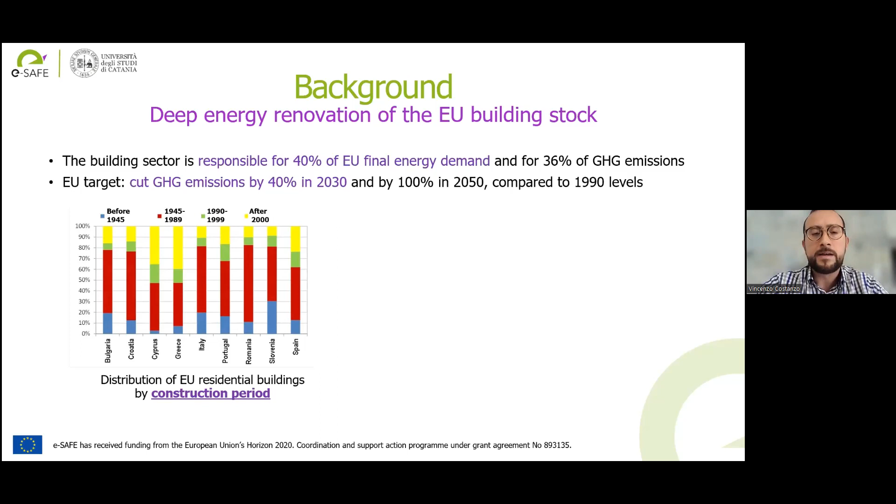If we see the histogram on the left, I have reported the construction period for the building stock in Europe for most European countries. If we look at the graph, the blue and red bars represent buildings built before 1990, and this represents the vast majority of the buildings in the stock. So we have a building stock which is really old and energy inefficient.

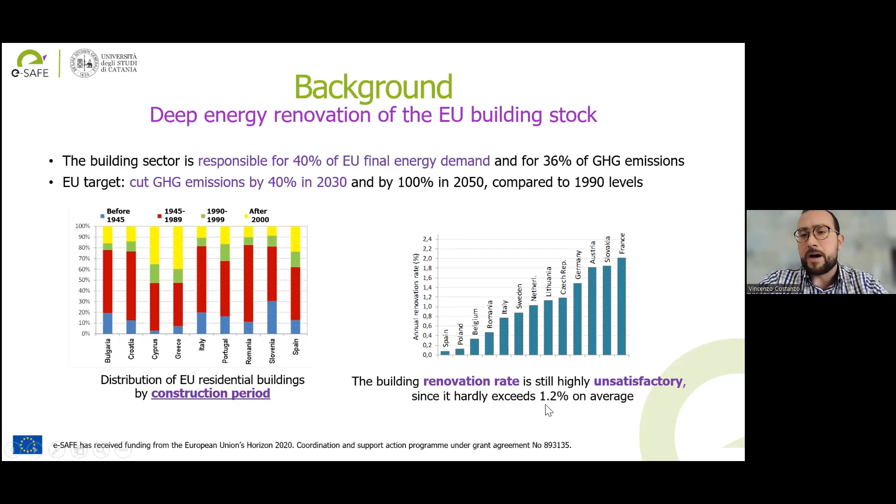Some current studies, also developed by the European Union, say that in order to meet these very ambitious targets, we should renovate the existing building stock at a rate of at least 3% per year. But actually, the renovation rate in every country is much less than that, about 1.2% on average. So we have a lot to do on the renovation side.

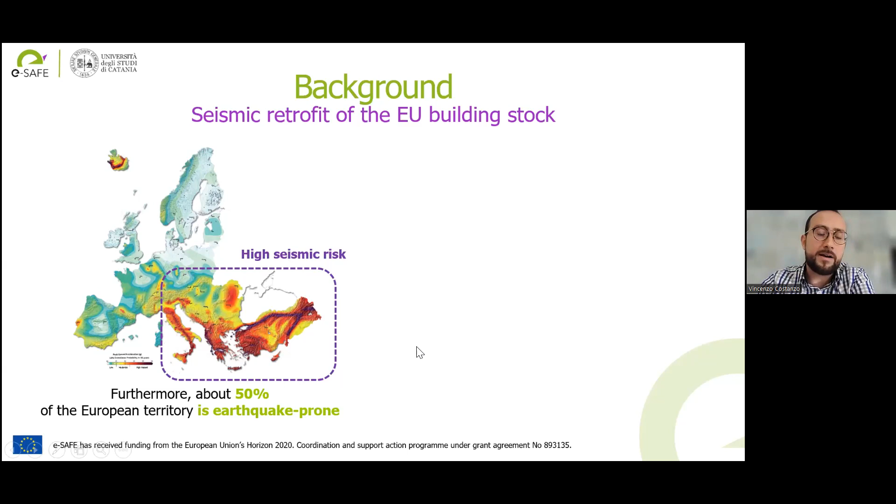Besides the energy figures and the importance of decarbonizing our environment, we also suffer from seismic risk in Europe. About 50% of the territory is earthquake prone, and in particular the zones highlighted here—some Eastern Mediterranean countries, let's say Italy, Greece, but also Turkey—suffer from very high seismic risk.

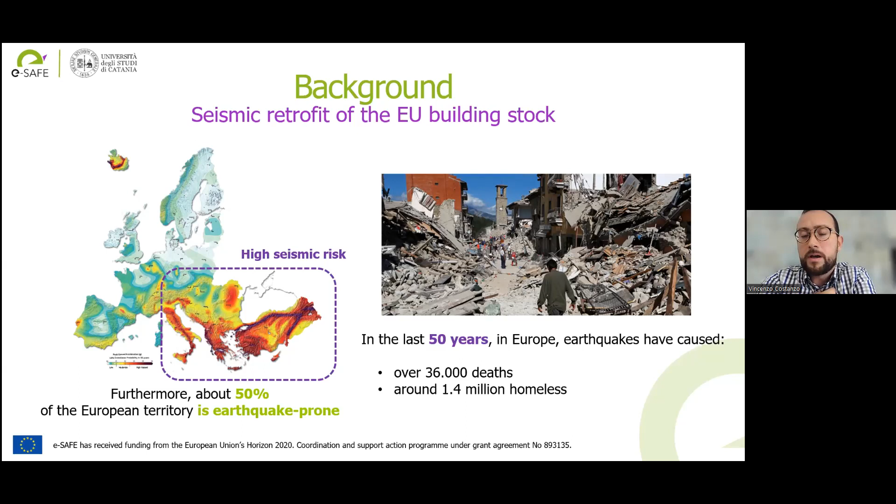Just to give some figures: in the last 50 years in Europe, earthquakes have caused more than 36,000 deaths, and also the need to relocate more than 1.4 million people.

It's an immediate consequence that it doesn't make too much sense to renovate buildings only from the energy side if we also suffer from a very high seismic risk. So this is exactly what e-SAFE wants to tackle: combining energy and seismic renovation.

The e-SAFE project targets specific building constructions. We are not targeting all possible existing buildings to renovate, but focus on non-historical buildings made of reinforced concrete—the typical buildings found after the Second World War for reconstruction. Something between 80 and 90% of these buildings are made up of reinforced concrete frames, so for these buildings we propose a combined energy and seismic renovation.

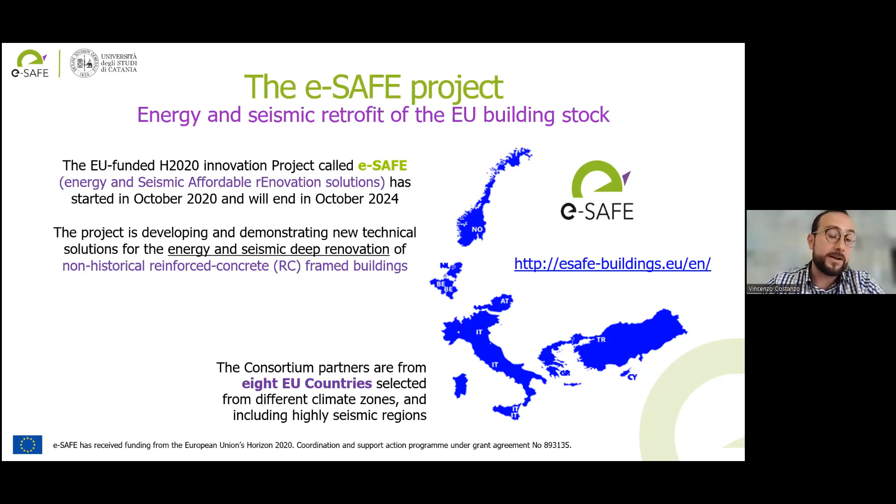The project started in October 2020 and is expected to be finished by October 2024. We have 8 different consortium partners from 8 different European countries, some of them also with high seismic risk. The e-SAFE renovation scheme concept is highly holistic.

We want to combine not only technical solutions which are very efficient, but also make these solutions affordable for as many people as possible. So in the frame of the project we also care about cost—we want to minimize cost, we want to minimize disruption. During the renovation works, people can stay inside the building and don't need to relocate elsewhere. We also propose some financial tools to make upfront costs more affordable.

A key point is also the social issue. We need to make people aware of the need for this major renovation. But about this specific topic, my colleague Venera Pavone will talk more in detail later on.

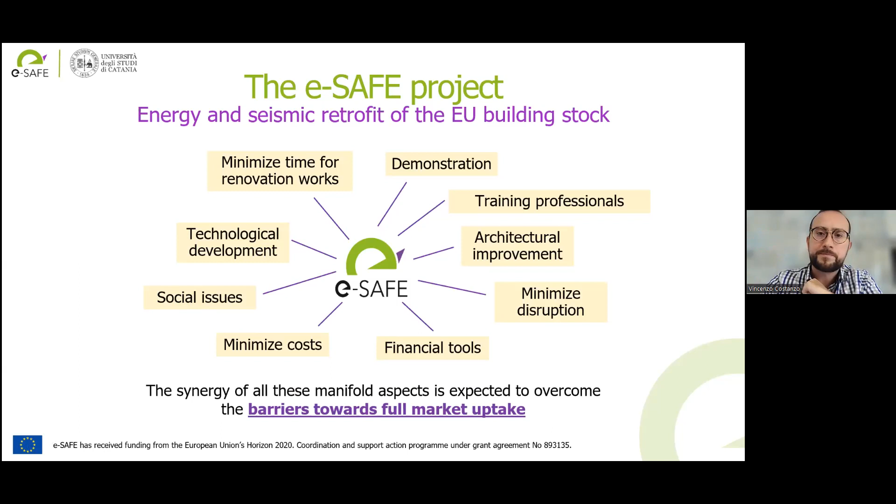From a technological point of view, we want this renovation work to be done completely from the outside. The idea is to create a new building shell through the use mainly of prefabricated wooden panels. These wooden panels come in two different forms. The e-CLT panel, made of cross-laminated timber, has a structural function. The combination of these panels, attached to the existing frame through innovative friction dampers, makes the building seismic resistant.

The other prefabricated panels, called e-PANEL, are more for the energy efficiency side. These panels are covered with a suitable layer of thermal insulating material. The combination of e-PANELs and e-CLT also creates a new architectural image for the building.

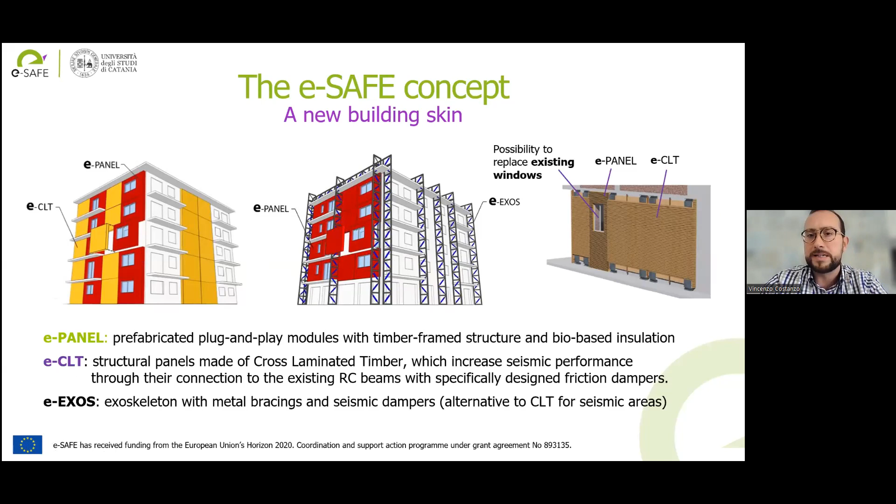In some cases, where for example the application of e-CLT is not convenient, we envisaged the use of some metallic exoskeleton for improving the seismic resistance. This solution is called e-EXOS.

From the energy side, besides the improvements due to better insulation, we have also developed an innovative mechanical system configuration called eTherm. eTherm is basically a new centralized technical system for the building that provides altogether the thermal energy needed for space heating, space cooling, and domestic hot water production.

The eTherm concept makes use of electric heat pumps. These heat pumps are air-to-water heat pumps, so they take heat from the outdoor air and then convert this heat into heating or cooling according to the season, through the production of hot or chilled water.

This water, called the technical water, is stored within suitable storage tanks. From the storage tanks it is driven through every apartment into smaller tanks. These tanks combine domestic hot water for residential uses and have embedded plug-and-play hydraulic connections to connect to the existing system for heating and cooling.

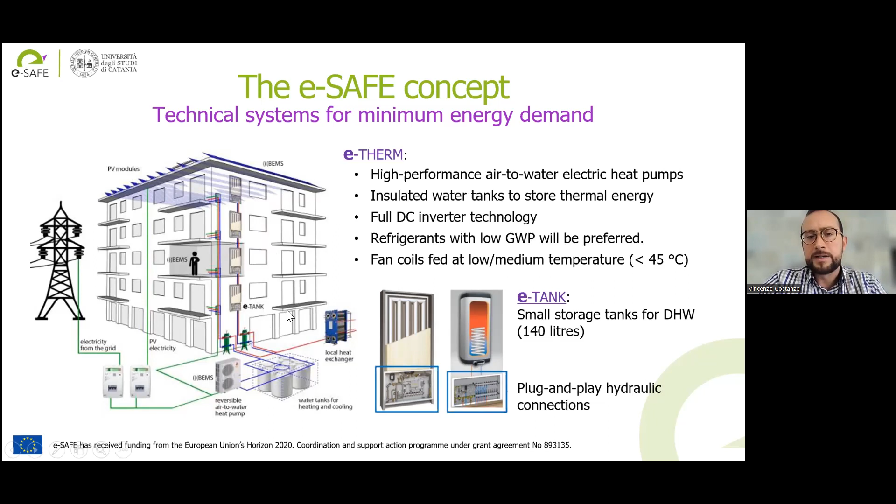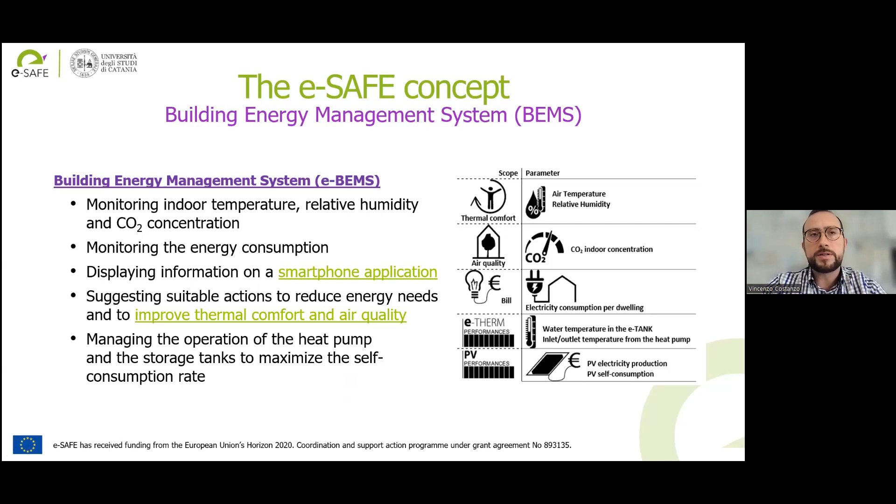Finally, we have a building energy management system called eBEMS, which manages all the technical systems and also performs monitoring of indoor conditions in terms of thermal comfort and indoor air quality. The aim is to provide residents and building users with meaningful information about current indoor conditions, while also suggesting actions—for example, opening windows if the air is too stale—to improve not only thermal conditions but also the energy consumption of the building itself.

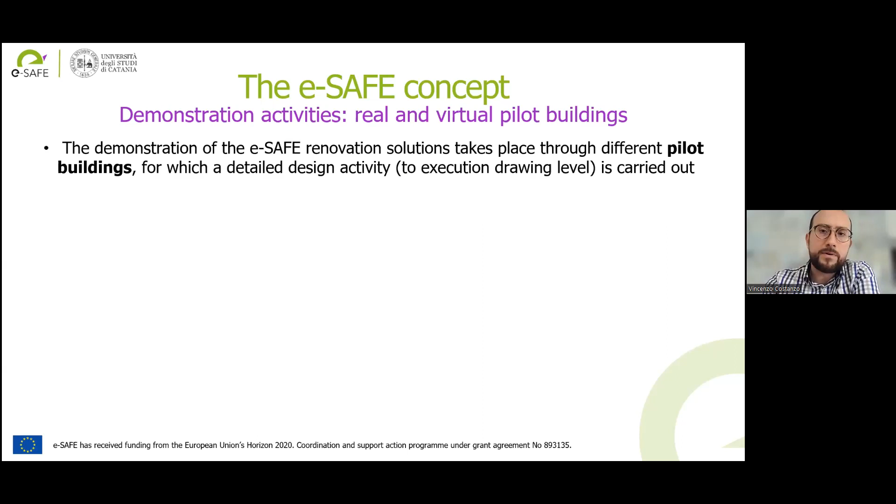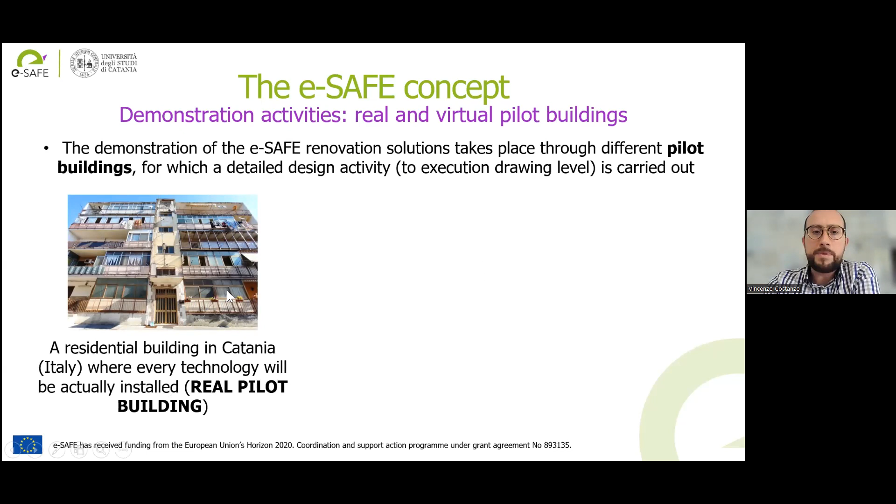The demonstration of our concept takes place through pilot buildings. These pilot buildings are three. One of them is located in Catania, southern Italy, and this is called the real pilot building because actually every technology I have already presented will be really installed on this building.

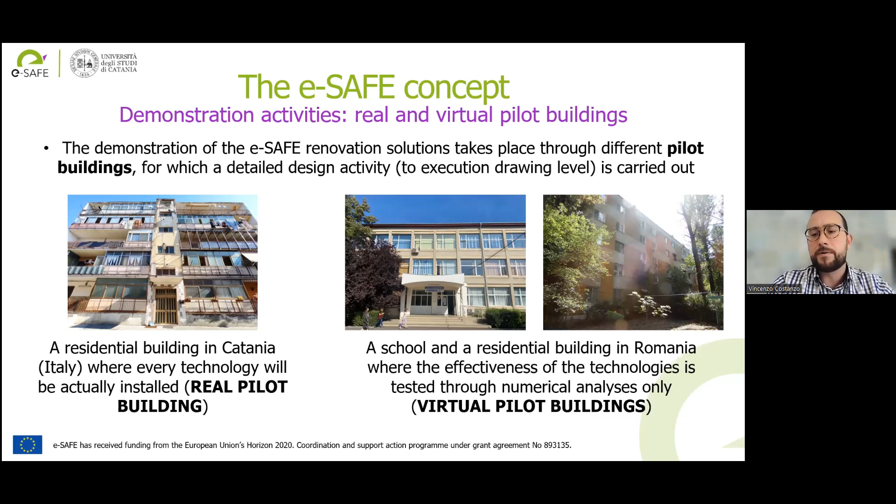We are also working on the renovation of two other buildings located in Romania, in particular a school building in Timisoara and a residential building in Bucharest, where the effectiveness of the technology is assessed through numerical analysis. In these two pilot buildings, we will not really install the technologies, but we are providing a very detailed design for the local stakeholders that can use this design for getting fundings and so realize the renovation.

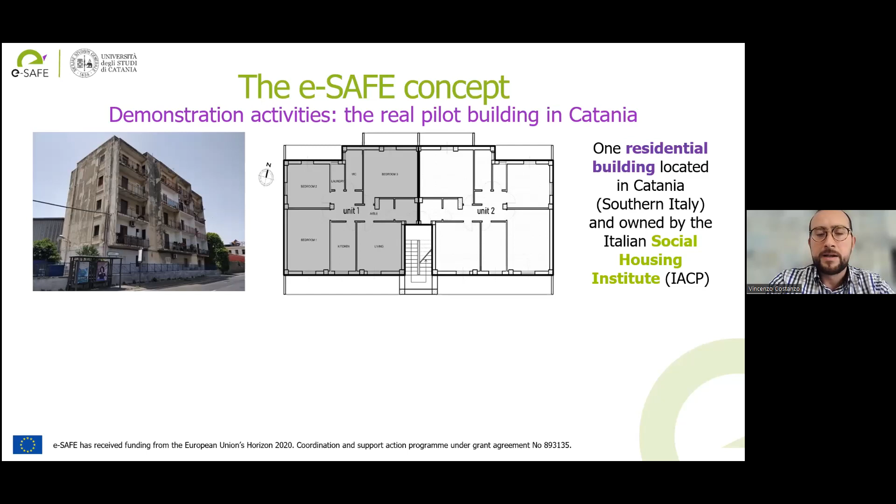Now I will present some of the expected energy savings and improvements in the energy efficiency of the buildings, starting from the pilot building in Catania.

This pilot building is a residential building that was built around 1960 and was never renovated since then. It is a 5 floor building with 2 apartments per floor, and we do not have any centralized system for heating, cooling, or domestic hot water. So every flat is totally independent from each other.

Within this flat, we have some basic boilers and electric heaters that provide domestic hot water production and heating of the environment. Just in some flats we have split units that provide also space cooling. The envelope is quite poor in terms of thermal performance, as we can see from the quite high U values for the walls, the roof, and the windows.

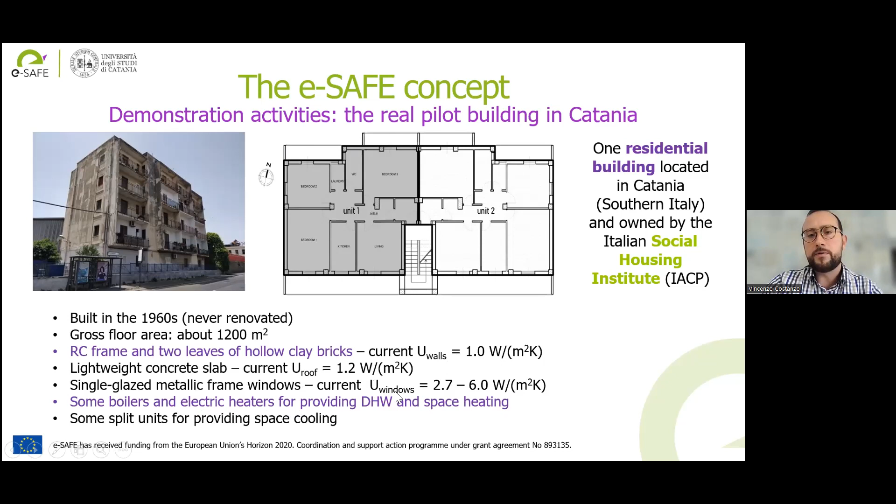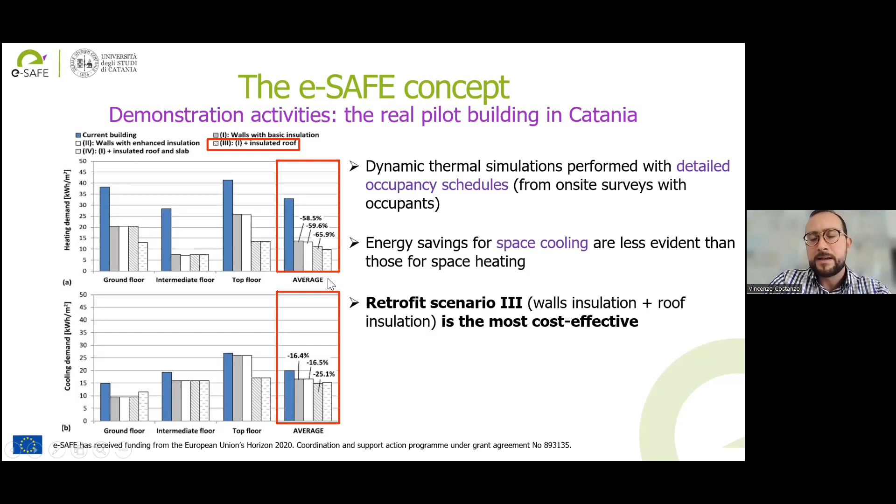We ran also a cost effectiveness analysis, and we found that the best cost effective retrofit solution is that of insulating the outer walls, the roof, and of course using the e-therm concept. In this case, we can expect energy savings for heating of about 66%, and of about 25% for space cooling. This turns out that the amount of energy which comes from fossil fuels is saved in a range between 85 to 95%.

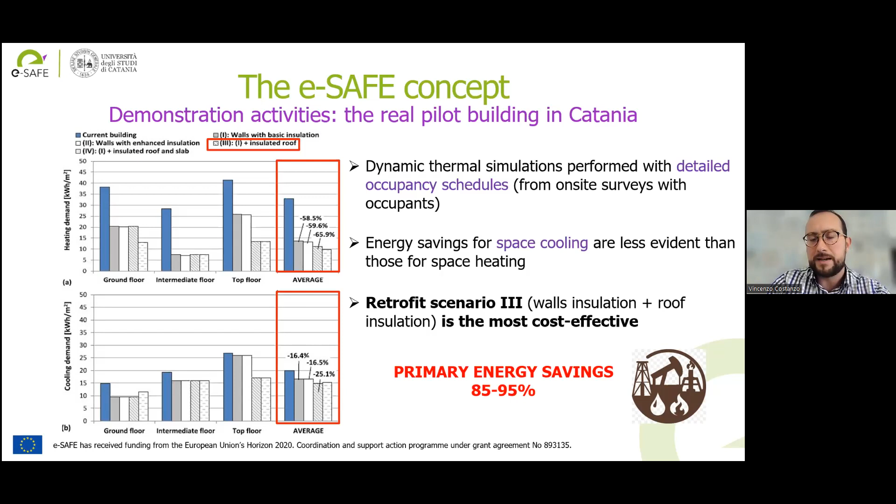In the case of the school building in Romania, which is located in Timisoara, the building once again was built around the 1950s, but it went through a renovation around 2006. In particular, it was the windows that were replaced during this renovation.

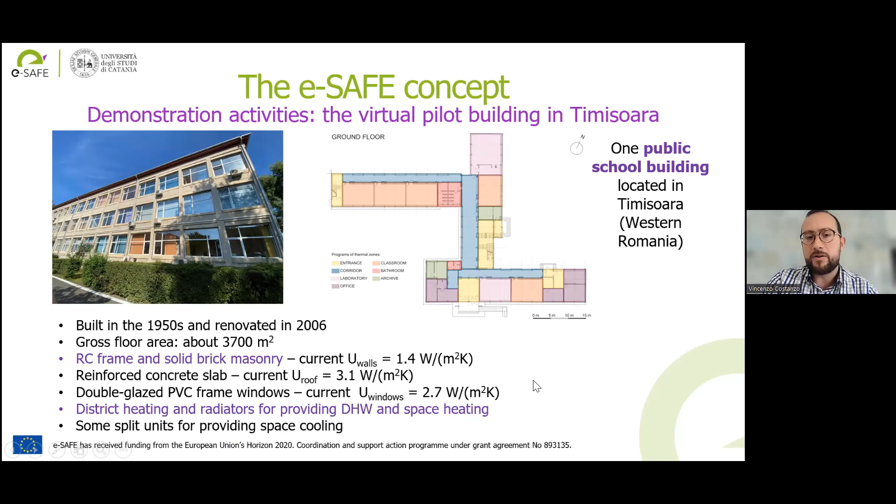Also in this case, the envelope, the walls, the roof, and in minor part also the windows were not that high performing. But in this case, the building was provided with a district heating system for providing heating and domestic hot water production. Once again, we ran other simulation analysis, and we focused only on the heating energy demand because it was the highest energy driver. So we almost have no need for cooling in this part of Romania.

A particular aspect of this renovation is that we also considered a mechanical ventilation system with heat recovery, because one of the issues reported by the students and teachers from the school was that during the winter the heating system was on, but it was not very well controlled, so there was overheating within the rooms. But because of this problem, people were used to open the window, so we had a very highly energy inefficient behavior from the people there.

I'm sure this is something Venera will talk about a bit later.

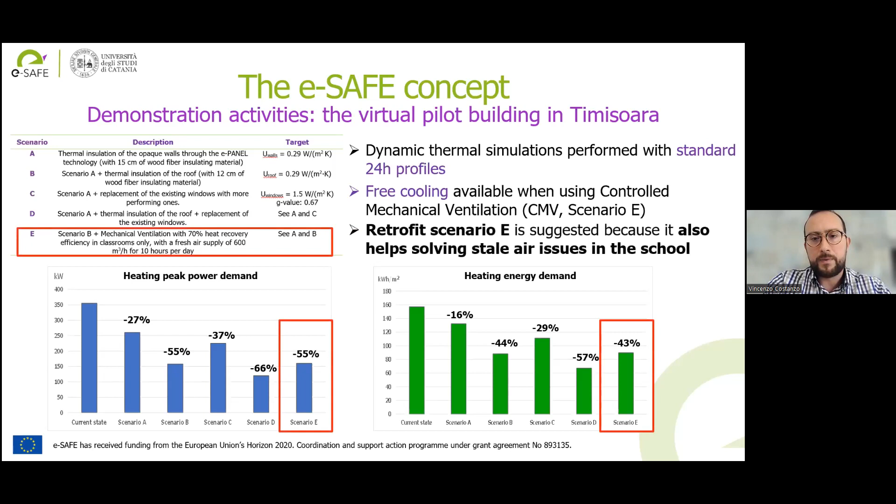So once again, with the help of these advanced simulations, we developed this retrofit scenario for which savings of about 43% in the heating energy demand and of about 55% in the peak heating power should be achieved. This turns out to be within a primary energy savings range of 75 to 85%.

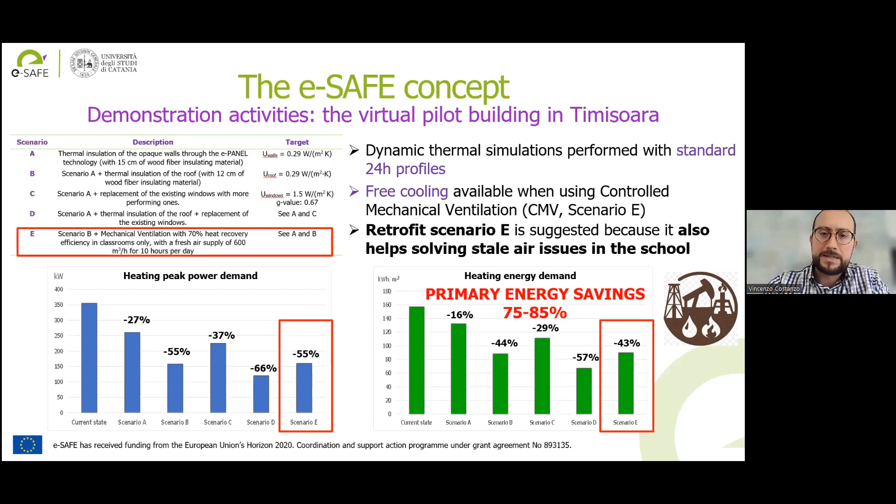Finally, for the building in Bucharest, which shares something with the building in Catania, again it was built around the 1950s.

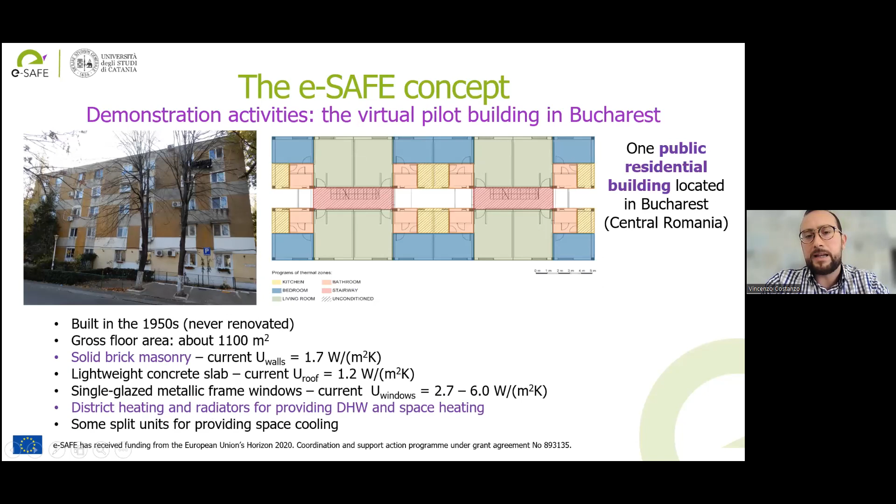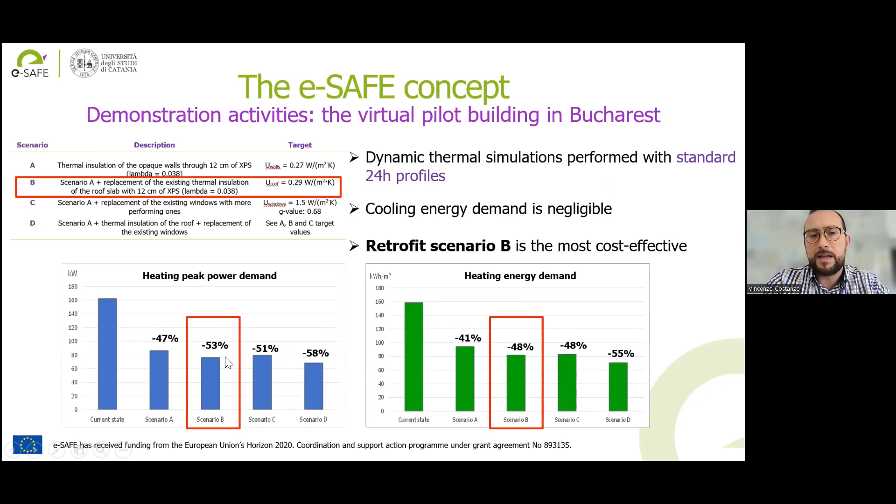It has 5 stories, still with an underperforming building envelope, but with a district heating system combined with radiators in each flat for providing heating and domestic hot water production. Savings are expected in the range of 50% for the heating energy demand and 53% for the heating peak power demand. Primary energy savings are expected to be in the range of 75 to 85%.

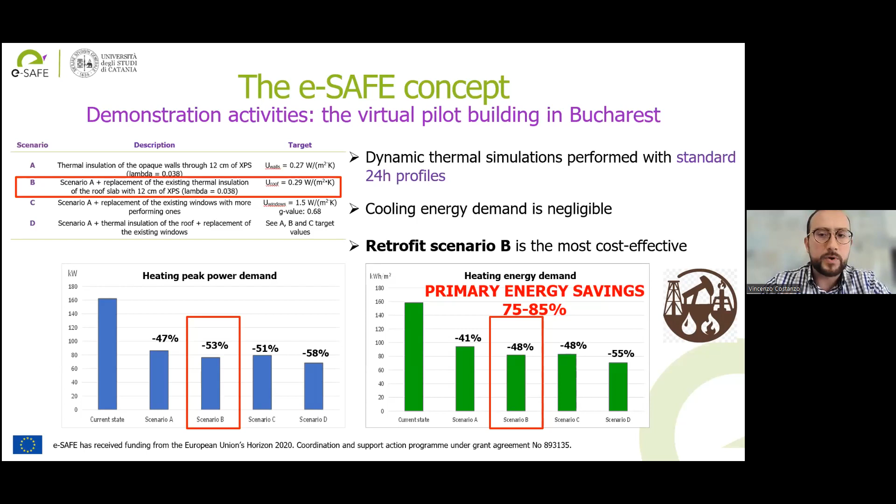I want to stress, to conclude my intervention, that of course these savings are estimated. We will measure the real savings in the pilot building in Catania, and double check if everything is on track. But a key point is that we are confident these figures are reliable because of the engagement with the local stakeholders we carried out during the co-design process, carried out by my colleague Venera Pavone. I leave the floor to her, so she will explain better what I'm talking about.

Okay, can you hear me? Yes, perfect. Thank you, Vincenzo, and thank you also to Corp Allianz for this webinar.

We are discussing one of the main topics for the future of our city, that is the necessity to spread seismic and energy retrofitting. My task, as Vincenzo said, in the next minutes is to explore one of the dark sides of renovation, the social aspect of retrofitting. There are many issues that can be raised from this perspective, but this evening I'm going to show you what we have done in terms of co-design, especially in Catania, the co-design with the goal of a real implementation of the e-SAFE project. It took a very long process that lasted 2 years.

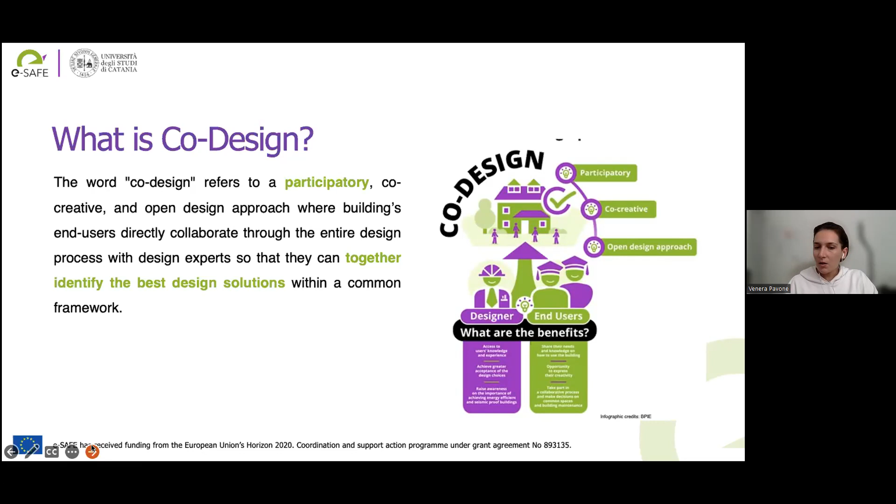In eSafe, we experienced 2 co-design processes so far: in Catania for a public housing where eSafe will be implemented, and one in Timisoara, that is a public school. We will work also in Bucharest for the co-design of another residential building in a low-income neighborhood, but that process will take place in the coming months.

Co-design is conceived not as an event or series of events, but as a complex social process. So it is expected to be as diverse as the people involved and the issues at stake. We don't have an applicable step-by-step procedural instruction, but the 2 processes were structured according to a general idealization, based on a first phase, a second phase that is co-analysis, and then the co-design phases.

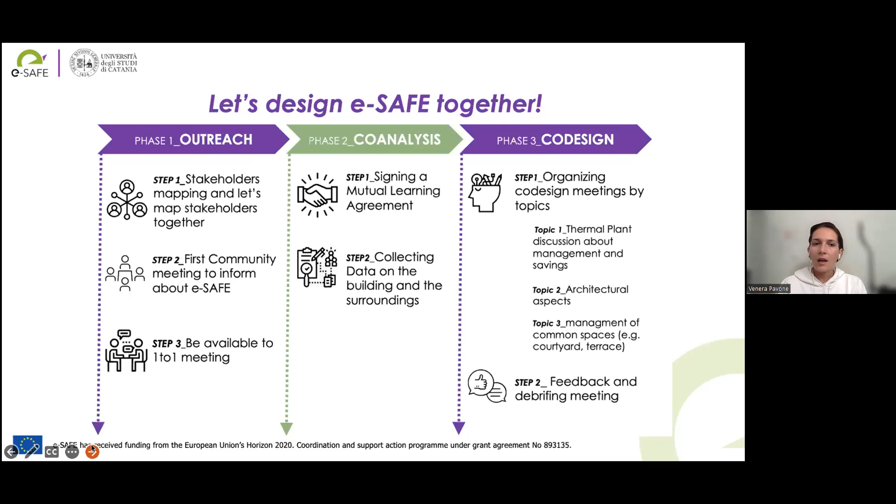Regarding the first phase, the initial outreach is essential because it ensures that all the people involved in the co-design are those who can take effective decisions on the seismic and energy interventions that need to be implemented. The outreach phase also provides the basis for developing a collaborative environment from the very beginning. This is particularly true in a context like the one in Catania, characterized by a high level of distress and social vulnerability.

The building is a public housing building. It is in a neighborhood that was an abandoned industrial neighborhood, in very bad condition.

In the case of Catania, the meeting was attended by the residents of the building, by the representative of the public housing agency, UNICT researchers, and representatives from 2 local tenants unions. The aim of that first meeting was to present an overview of e-SAFE, the project, and the future activity of the co-design process, and to make residents aware of which interventions were covered by the budget of the Horizon 2020 project, like the panels, the CLT, and the renovation of thermal plants explained by Vincenzo just a few minutes ago, and which work was not covered and should be included in the design only if the owners were willing to pay. To give you an example, this was the case of the finishing of the staircase, which wasn't included in the Horizon budget, but as part of the renovation was important to be implemented.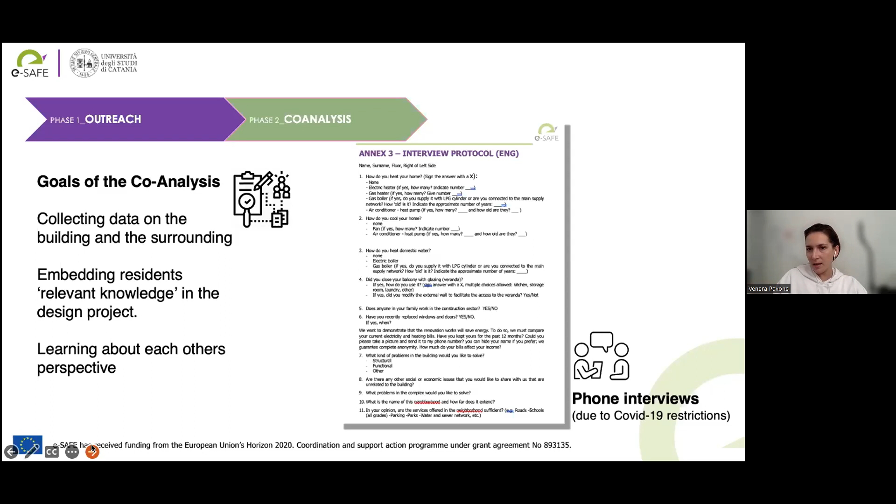Once the first collection of data was completed, we moved into the co-design phase. The overall goal of this step is getting all the people involved into a design thinking attitude. This implies simplifying as much as possible the design process and focusing each meeting on a single topic that can be addressed collectively. So we decided to...

...organize an intensive co-design workshop in the fall of 2021. And except for some studio activity reserved for UniCT faculty and students, as you can see in the picture, all the meetings were scheduled over the weekends and located in the pilot courtyard to maximize residents' ability to participate.

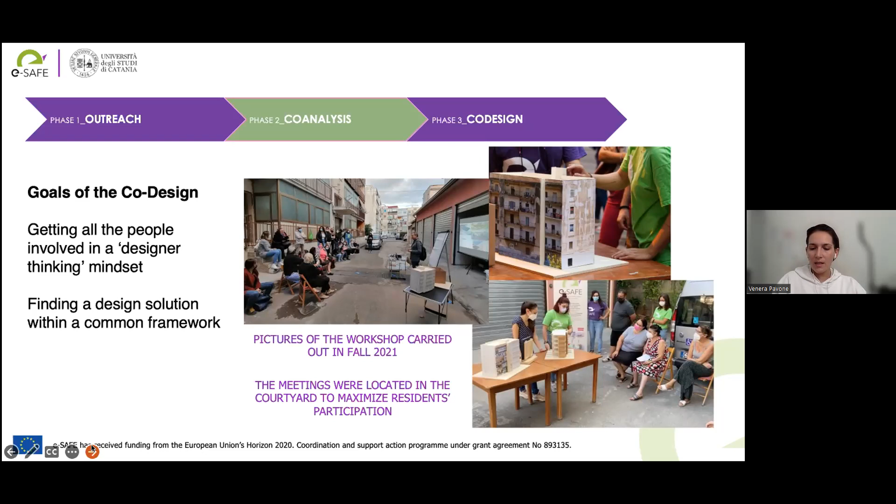In the workshop, we addressed all aspects regarding the project: structural, thermal plants, aesthetic issues, and so on. All the detailed activities are described in a public document, the eSafe report of engagement co-learning activity. If you want, you can find it by Googling eSafe community on Zenodo.

Here I'd like to point out the use of some tools that help people with no experience in the field of retrofitting and building construction to communicate with each other. We worked with people who also had a low level of education, who feel many barriers in expressing and saying what they think or what they desire.

This is the case of the use of photo voice. At the end of a meeting during the workshop, we asked each resident to share via WhatsApp or email a picture of their dream building. What I mean by dream building: we asked them to send us an image representing a building similar to theirs, but with a much nicer appearance. Such a technique uses photography as a communicative means.

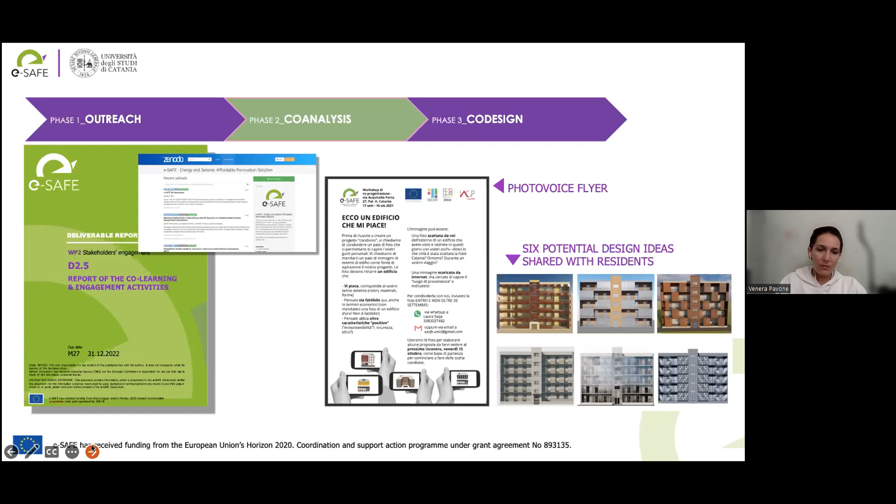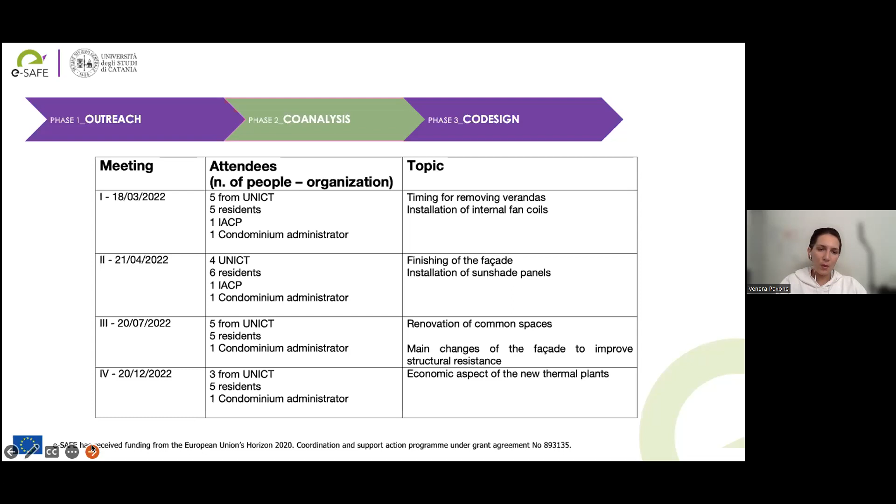Also in this case, I'd like to point out some issues that are relevant if we conceive retrofitting not just as a technical matter, but also a social one. This is the case of the removal of the veranda.

The discussion with residents therefore focused on explaining why keeping the veranda basically meant preventing deep retrofitting of the building. The discussion triggered a more general reflection on the need to balance single household needs, that is keeping the veranda, with the collective interest, that is the ability to file for renovation. At the end, residents agreed to remove the veranda under the condition to develop a final design that includes the aesthetic and functional possibility to build new ones.

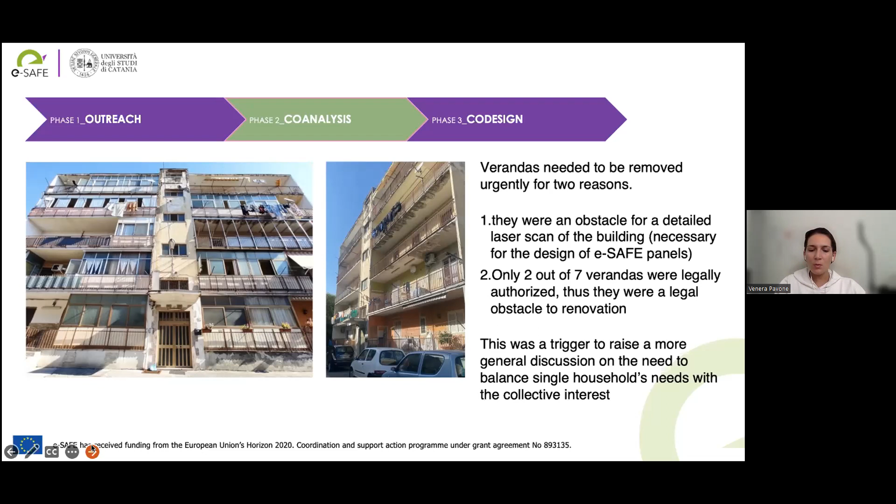The other issue, as Vincenzo presented from a technical point of view, was the installation of a thermal centralized system. In a meeting, Vincenzo and Professor Evola explained how the new plants work, and we pointed out the pros and cons of this new system. The advantage was that it would generate significant savings. The main disadvantage was the coexistence of the new system with the current one, to be used only for powering household appliances, which would mean residents paying two bills.

Residents showed significant concern about this point, about the duplication of bills, and the discussion brought to light the underlying reason beyond such concern, which was the centralized nature of the system. This is not a surprise for us, because we are working in a social system made of people with limited economic means and characterized by a lack of mutual trust when it comes to paying bills.

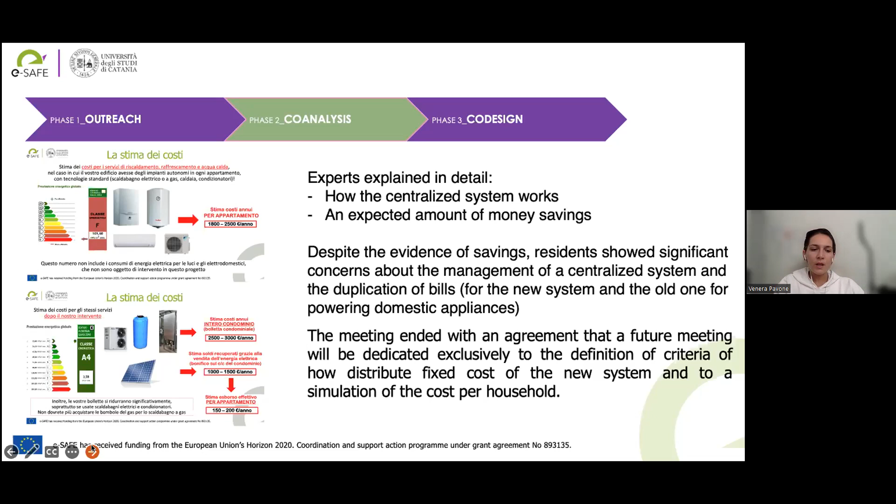We also conducted a co-design process for the public school in Timisoara, and in this case too we organized a first moment of outreach and stakeholder mapping. The co-analysis was carried out through a focus group with students, teachers, the principal, and other public authorities in the field of education, to raise the main aspects to be included in the project. This was the case of the mechanical ventilation.

We carried out a workshop meeting where we worked together with craft activities to give an identity to the e-SAFE element, taking into account design elements for indoor visual and thermal quality.

For further information, since time is going on, you can visit the eSafe webpage or simply text us. We would be very happy to share with you all the things that we have done.

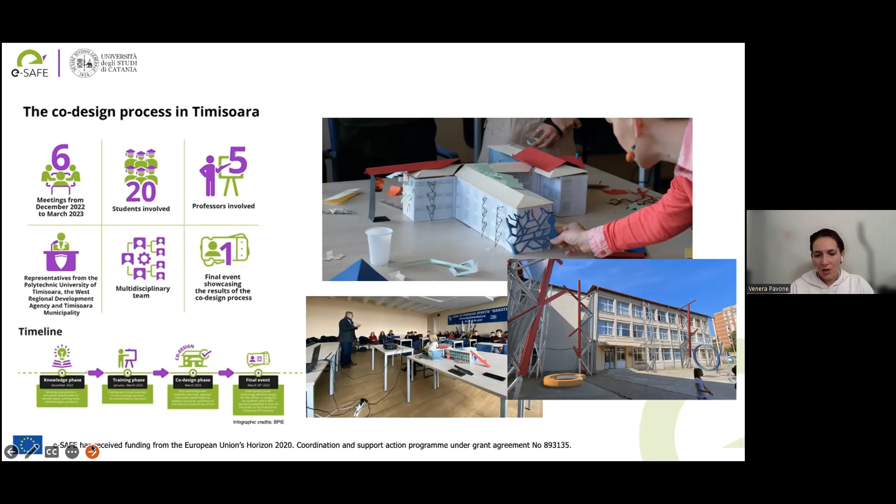Just to sum up some of the points I'd like to highlight: a co-design process pushes us to conceptualize the building not just as a material entity to be modified, but as a complex system where the material dimension relates to the human one.

When we started the process in Catania, the atmosphere was very hostile due to pre-existing conflict between public institutions and the residents, as well as amongst the residents themselves. The simple experience of meeting periodically with a facilitator pushing for mutual respect, mutual listening and understanding helped in dealing with the controversial issues and reaching collective decisions.

The frame of the three creative phases, as I showed you, outreach, co-analysis and co-design, follows a conceptual roadmap that facilitates a shared understanding of a participative method, which gives value to the mutual learning of people involved, as well as the co-design of solutions.

Nevertheless, the co-design process is based on an open approach, which means tailoring the activity to the resources of the context and stakeholders' capabilities, beyond the roadmap.